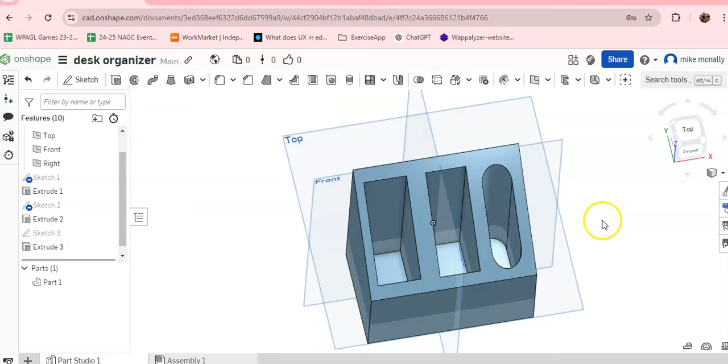Okay, we're going to show you today how to make a desk organizer to go along with your nameplate. We kind of have it here. You're looking at our desk organizer that we're going to add to the nameplate.

All right, let's see how you can do this. As usual, there will be a number of different ways, but I'm going to close this, create document, desk organizer, create public document.

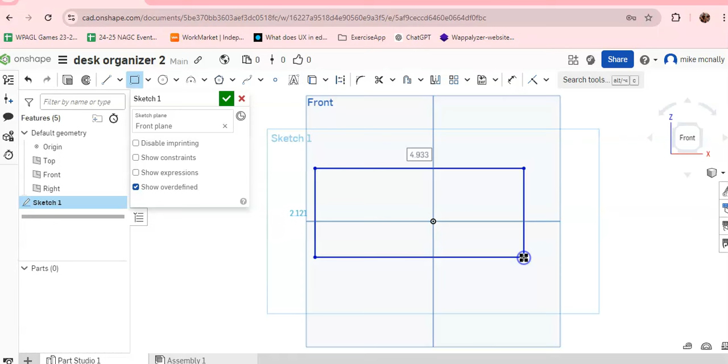I'm going to take a look at it from the front. Sketch on the front. Let's make a rectangle, and there we go. We're going to make this 4 inches wide - you can make it bigger or smaller depending on what you want to do. I'm also going to make it 4 inches tall. Okay, so we actually have a square there.

And I'm going to extrude it back 2.5 inches. So let's look at that. This is what we've got. Okay, that's what we're working with for now.

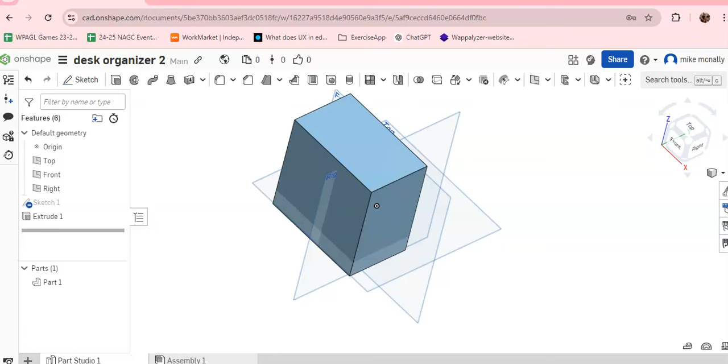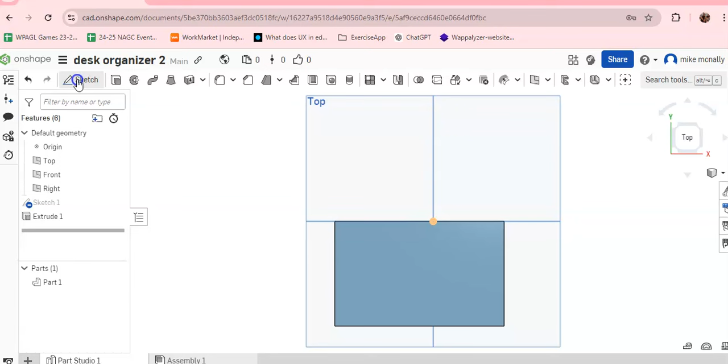Okay, so we're gonna put stuff in there, paper clips and stuff. So we're looking at the front. Let's look at it from the top and put some holes in it. There we go. All right, so I'm going to sketch here.

I'm going to take my corner rectangle. I'm going to go 1, 2, and 3.

You can dimension these whatever size you want, and you could determine how far away you want the hole to get from the edge. So if I click on this line, and then click on that line - right now it's 0.37, what if I want it to be 0.25? Oh, I want this oval or this hole to be 0.25 away from the edge. Do that, and it moves stuff.

But because I had sketched these all together, it's going to do the same thing to all 3, and I don't want to do that right now. So let's just undo that. But if you wanted to, you can determine all the relative sizes here.

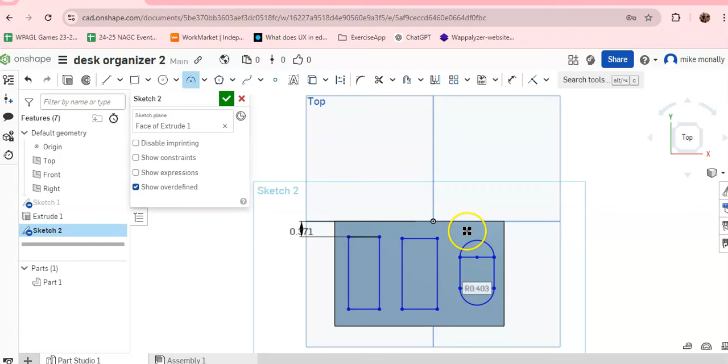We're going to do one more thing. Since I'm going to make this my pencil holder, I think this is kind of neat. We're going to make a 3-point arc. Click on that dot, and then click on that. So we've got something that looks a little bit like a foul shot on a basketball court.

But I need my trim tool. By the way, if you don't see the trim tool, it says trim right below it - it looks like scissors. If you don't see it, you may need to go to search tools and move things over to be able to see it. If you click in search tools and type trim, you should find it. So let's do that - I have it, great.

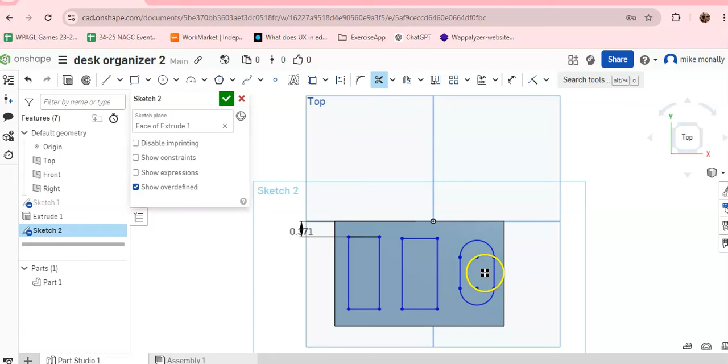And I am going to cut that line and that line and that line and that line. Now notice these are all still highlighted. Since they're all still highlighted, I can act on them simultaneously. So I'm going to go and extrude here.

I'm going to remove. Now remember, this was 4 inches tall, so I'm going to take 3.75 - it's only leaving 0.25 inches left at the bottom. I don't want to go all the way through and make a hole through the bottom so stuff falls out, but I don't want it to be a really thick floor either.

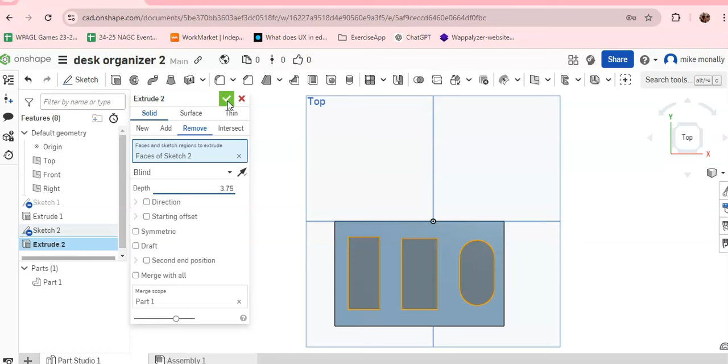And there we go. Okay, so we've got our holes for our stuff, but you'll notice that a lot of times in desk organizers, they're not rectangles quite like this - they're kind of slanted. So here's something you might want to do.

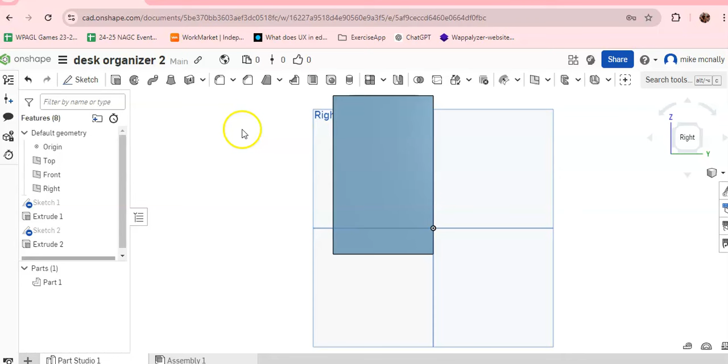I'm going to click and look at it from the right, and I'm going to sketch on to the side here. I'm going to use my line tool - I'm going to go here, here, here, here, and I just made a triangle, and you could dimension this to change how big this triangle is.

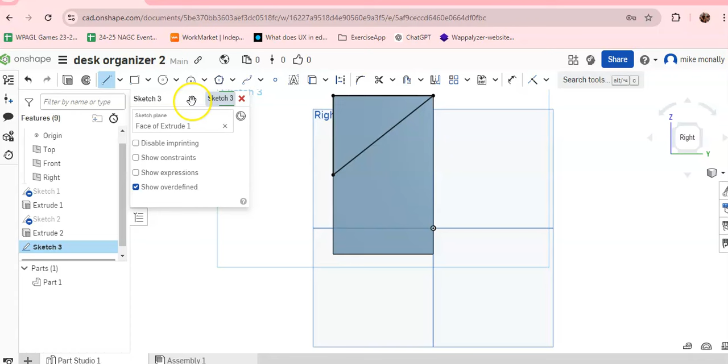But I'm just going to go and extrude and remove and change blind through all. And okay, now it's got this rectangular thing. Oh, but look, my holes are still there for my stuff.

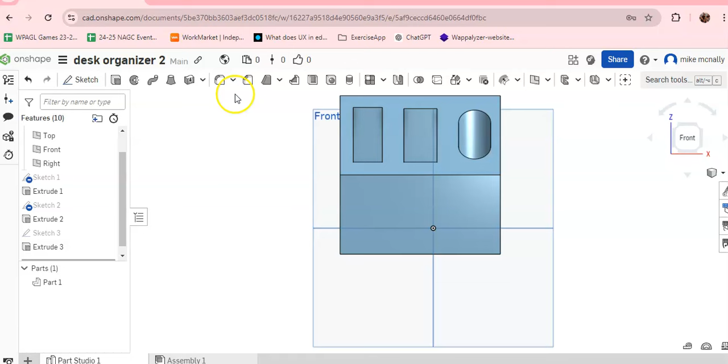Don't forget to put your name on it and decorate it, to make it your own. But there you go - that's our second part of the desk organizer, or the desk organizer for the nameplate.